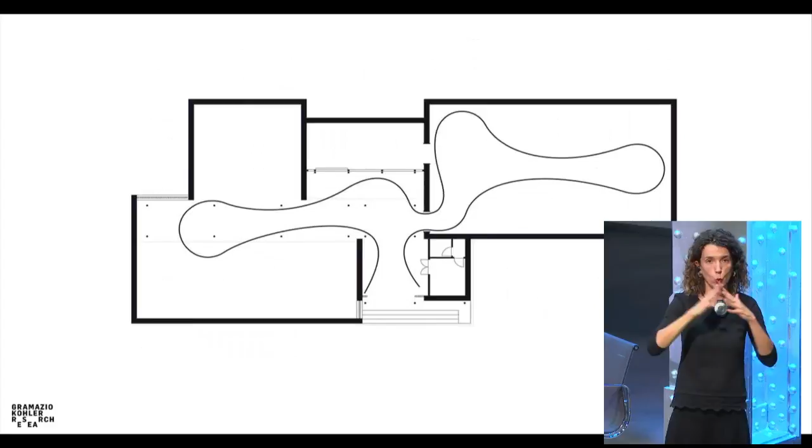Now, this was the installation in the pavilion. It's a 100-meter long wall, and the installation is called Structural Oscillations, because wherever this wall was relatively flat, the wall started to oscillate, and wherever the wall was curved, it just stayed curved, straight up.

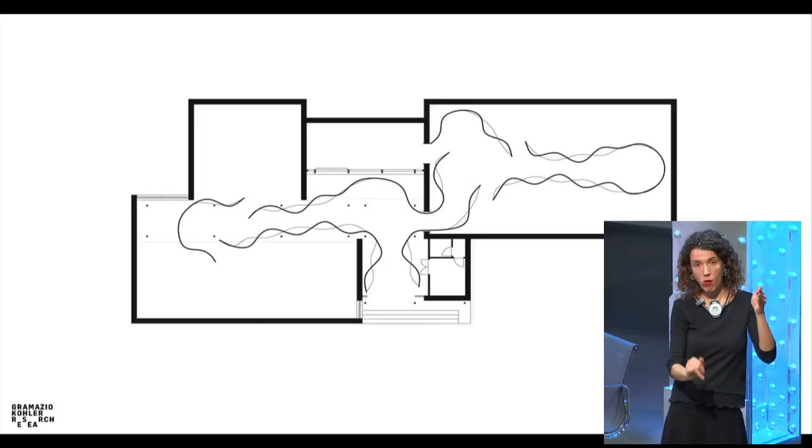Now, why did it do that? Well, this was a way to have all these individual wall elements standing by themselves, so you didn't need any further structural support, you didn't need any anchoring in the floor. Basically, it's like a sheet of paper that you fold a bit until it stands. So we embedded this kind of structural logic into the wall, and through that made a very simple constructive system to build it.

But you can also see that we did not design the actual shape of these oscillations. We designed the logic, the rules, the algorithm, you could say, on how this forms. And this is a bit the shift that we currently see, and the excitement that we have to design in new ways.

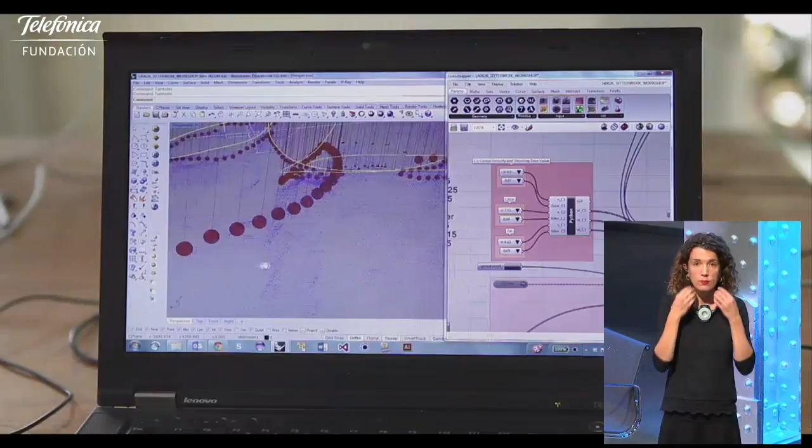And these structures at some points were very, very slender, maybe 10, 12 centimeters slender. The highest point, I think, was 2 meters 30, which we reached in this week. And I mean, it's very prototypical, it's not architecture yet, but you sense maybe there are completely other ways of building which we have not yet thought about.

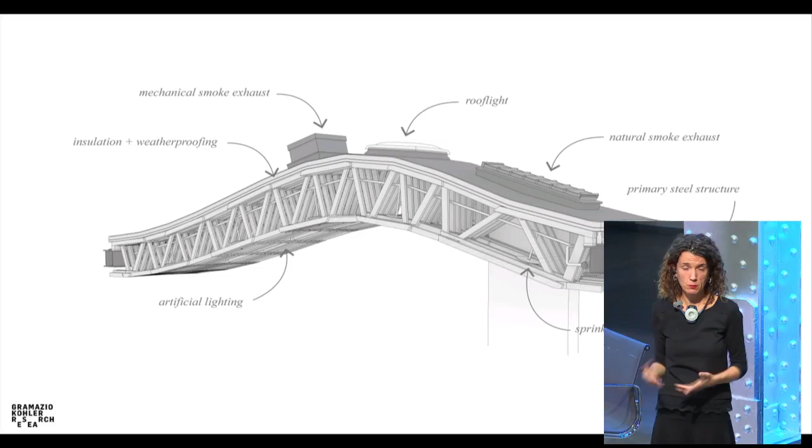So you see here these different systems, and now if you combine this with the plan that you've seen, you get a sense of how it adapts to every part. And whenever you change something—for example, if through the tendering process you got another manufacturer of the roof light—you change the roof light proportions, and this entire roof adapts to it.

And that's another advantage of these new design processes, that you actually stay flexible until a very late stage in planning. What usually causes huge turbulence if you change planning at a later stage becomes very easy here. If, as an architect, you think ahead about what could change later on in the process, you can build it in.

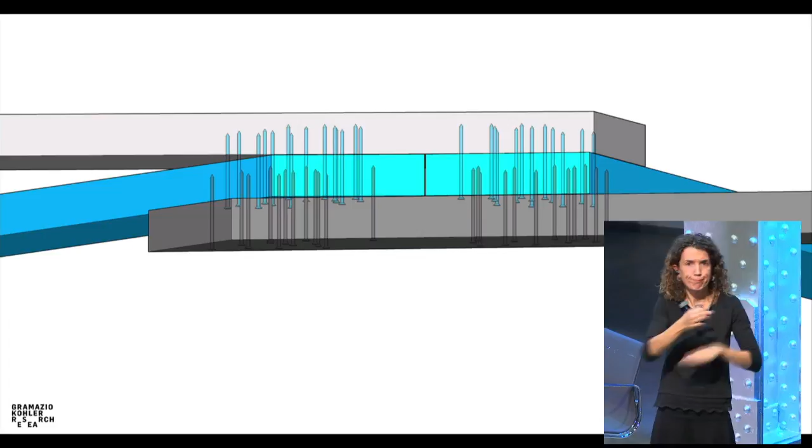To indicate why programming is needed, I'll show you this detail on how these slats connect. There are about 500,000 nails in this roof connecting these different slats. It's so complex to bring in these nails and fulfill the structural requirements while making sure you don't hit another nail in the next layer. It's really only algorithmically, with the computer, that you can do this. You don't want to do this by hand.

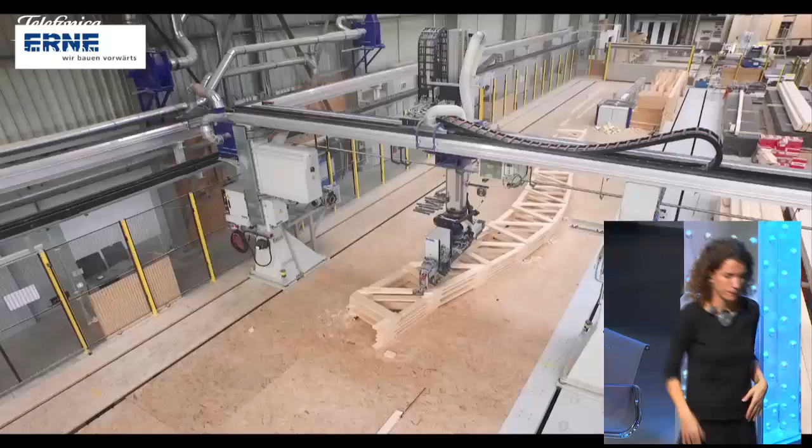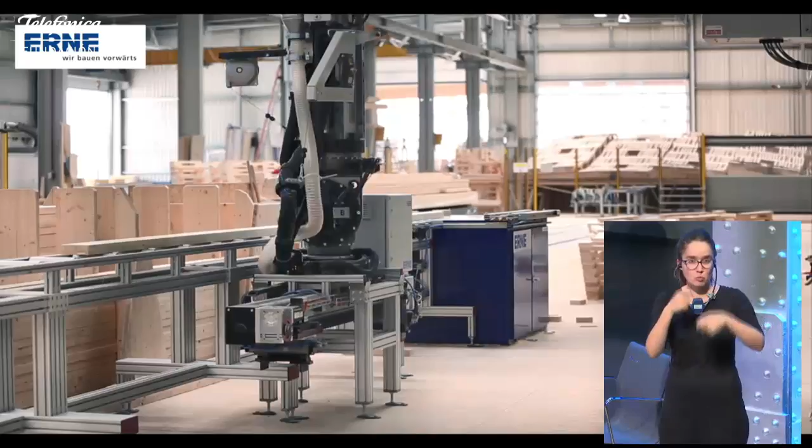So this is how it looks, and this is how the roof is produced. It's the Swiss manufacturer who specifically bought a machine to build this project, but is now able to do all kinds of projects with digital fabrication. So this robot basically takes a slat, cuts the different end angles, then lays them, does this nailing pattern you've seen before, then changes its aggregate, and does some end cutting and trimming.

What you really get is something again like a 3D printed beam, but here it's not printed from dust and binder or fused together metals. It's literally from material as you get it from nature, and connection. So it's very classical in that sense, using classical material systems and connection systems. At the same time, it's a fully digital additive construction process.

And it's quite economical, and like this we could realize this building. I can say that we all really like to live and work in this building, so we're the users also, and some other people, and most reactions are really very, very positive.

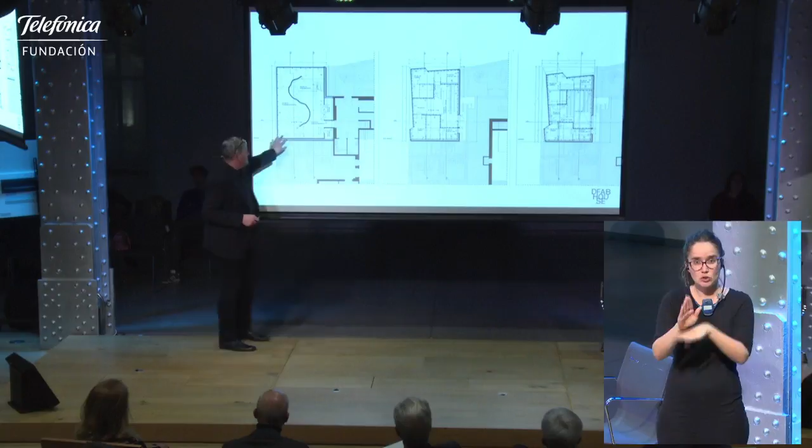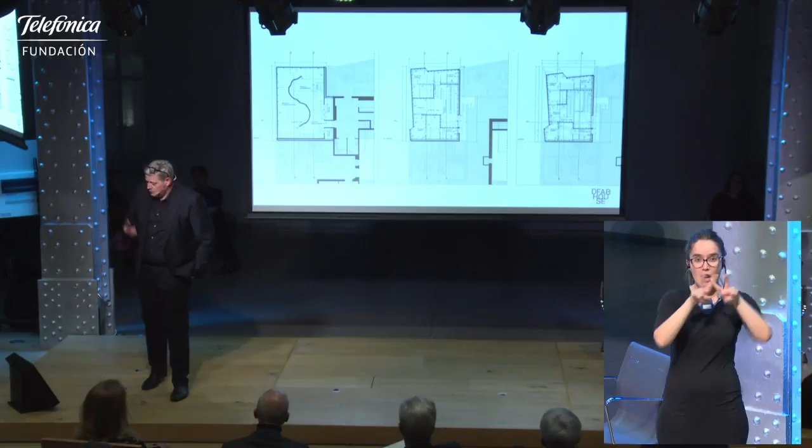Now we reconnect to where we were before, because a really good area to build this house is the Nest building you've seen before, and we got a parcel on it. Here you see the program of that house. It has basically a very open ground floor plan organized around this S-shaped wall, and then it has 4 living units for guest researchers in a quite dense two upper floors. So it's a 3-story unit.

This is the parcel that we got. This is roughly how it will look, but I'm not so interested in renderings - it might probably also change. We're really interested in the way that we build and design this. These are the different research projects that go into this building.

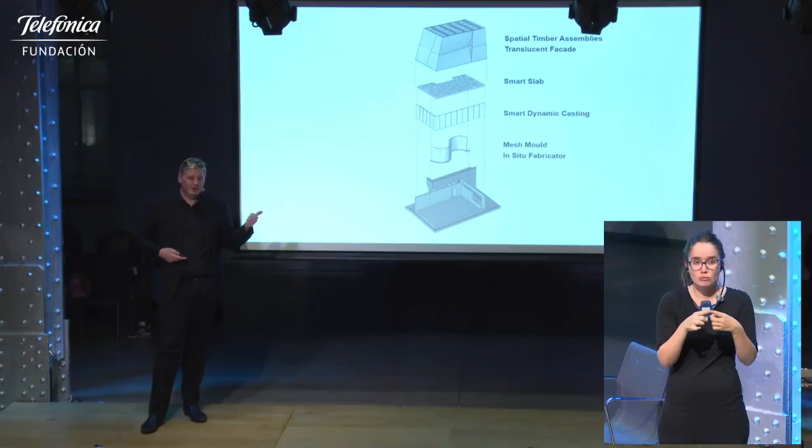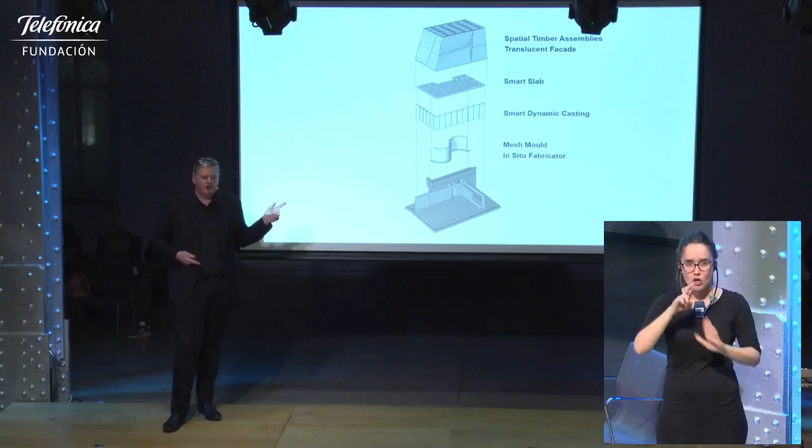What's really new in this building is that it's fully inhabited. It needs to comply to all codes in Switzerland, be it thermal insulation, fire regulations, etc. All the structural parts of this building are built by new digital fabrication technologies. So we bring digital fabrication from something which has a tendency to be ornamental to something really structural. That's the significant step, even though the building itself is quite small.

I'm going to walk you through quickly from below to top, just to give you a first impression. This is currently ongoing, so I also will not go into details. The first project is really this S-shaped wall, which is built by a mobile robot. This wall has been designed in a way that it can take the forces of, or carry the 2 stories on top, and take all the forces - also the wind forces, lateral forces - of the building. It's being built by a robot that builds this mesh structure that you can see here, optimized for fabrication.

You've seen the red parts before in this animation - red is when fabrication cannot work anymore. So it's optimized for fabrication, for structural performance, and for the spatial layout. Then this mesh structure can be filled with a manual process. So not everything is digital - it's a combination of human craftsmanship and digital craftsmanship.

It's not advancing anymore. Oh no, okay, here we go. Good, so that's the builder, or one of the builders. Somehow it's not.

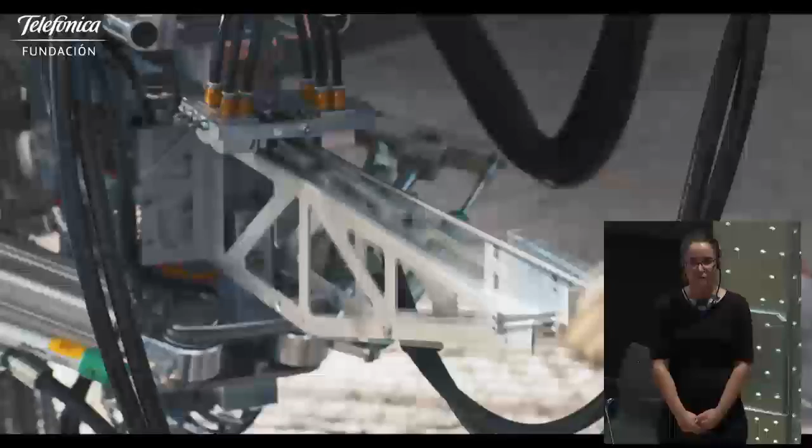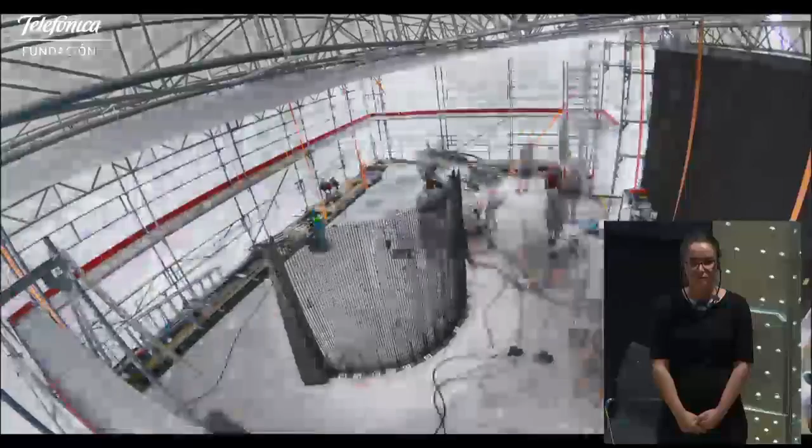If you take a look at the number of people and the robot on the construction site, you don't need to be worried in the short term. We have about a 4 people to 1 robot ratio. Now this video got stuck somehow.

So here are, at least from our group, the proud finishers. This has been a work in collaboration with another roboticist called Jonas Buchli, who developed the entire robotic system. His people are unfortunately missing from the picture. But I think you also see it's almost a pity to fill this structure with concrete, it's so beautiful just as this doubly curved mesh in space. You sense how the digital is very intimately connected to the physicality of this mesh.

So here are some impressions, and currently it's being filled. This is the first layer, and there's going to be a top coat on it. The remarkable thing here is that no formwork is needed to build this wall, so there's no waste for any formwork. You can build a doubly curved wall, saving a lot of material, and you can structurally optimize the shape, making differential wall thicknesses. So you can save a lot of concrete, and saving concrete is a big benefit for the planet, because concrete is the most polluting construction material we currently have, and it's the most widely used all around the globe.

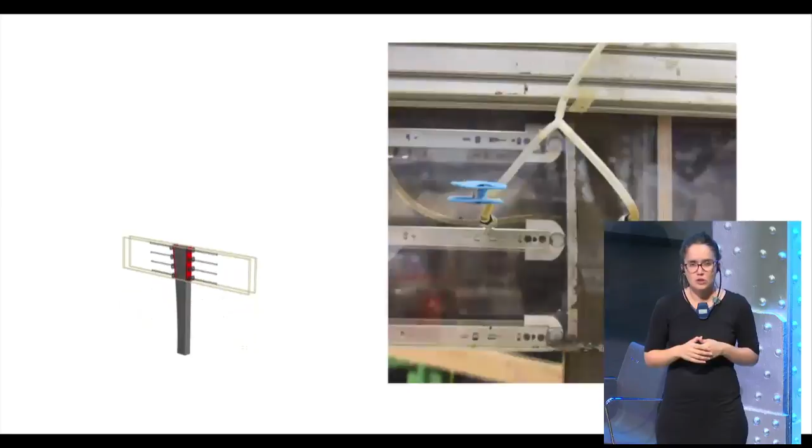I'll quickly walk you through this other concrete technology which we have. It's called smart dynamic casting. It's basically a slip casting process where you can change the form while you're slipping concrete, and you can produce elements like these facade mullions. Here you see one in a kind of drying situation, and here you see the final product, which has a very nice surface quality. We're almost at an industrial level.

Again, you don't need any formwork to produce these forms, and each of these mullions can be different. In this case, you have a different depth for each mullion, because the window panels don't all have the same size and don't all have the same loads. So you can have adaptive forms which have structural logics.

This is a project of the professorship of Benjamin Dillenburger, and our concrete, we call him concrete magician, Dr. Robert Flatt. This is a ceiling which is cast onto a 3D printed formwork, a very thin formwork, only about a centimeter thin, with very intricate forms. You can see these almost naturalistic forms, this high degree of detail, and how it adapts to the Mesh Mould wall below, directly taking over the formal characteristics of the Mesh Mould wall and reinterpreting it with another technique.

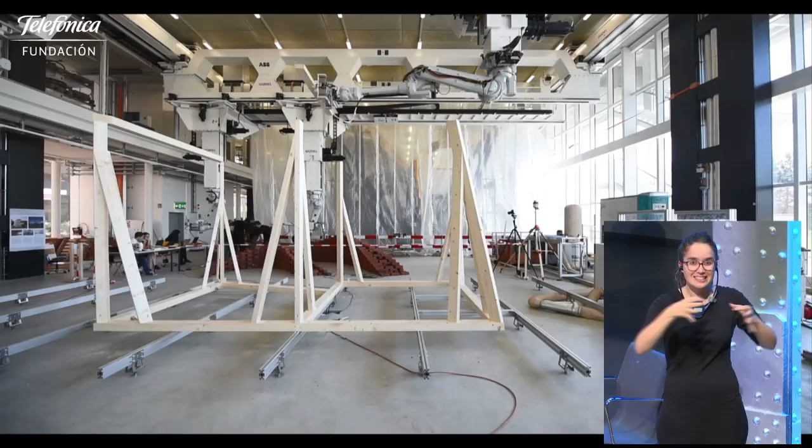So you need to find a sequencing logic where multiple robots can actually directly build spatial structures, and you see then there is an expression of this building typology in the structure.

You see how the robot, for example, once it places this beam, rotates in these side beams. So it comes here, drives in, then just rotates it in place.

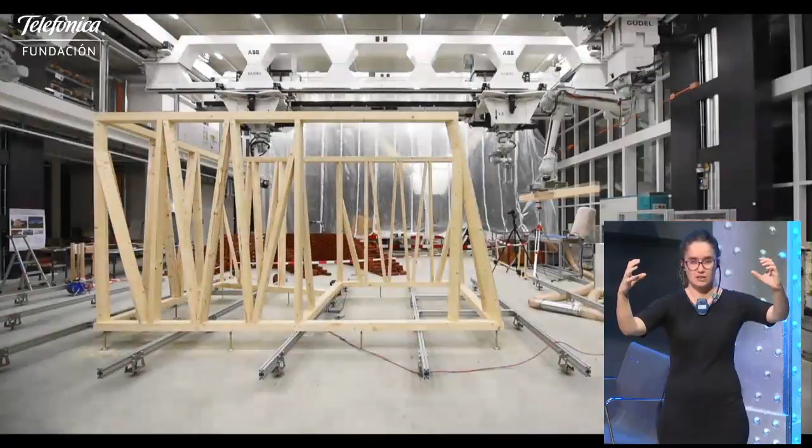And you can sense that, yes, it's close to what humans could do, but humans would really need to measure, etc. That's why they like to build on a plane, they don't like to build in space. But the robots really have the accuracy to just put something in space, wait till the other comes, etc.

This is also man-machine collaboration. The robots only really place the parts and cut the parts, and the humans do the connections because they're very fast, very agile, and see the details well. They can do minor corrections. So we don't need to automate everything to go into digital construction.

A bit of the complexity of these assemblies. Then we have a translucent facade developed for the system. This is roughly how it will look in the interior. So in the nighttime you will actually see the structure through the translucent facade. In the daytime it's actually very light, going to be a very light-filled spatial timber structure.

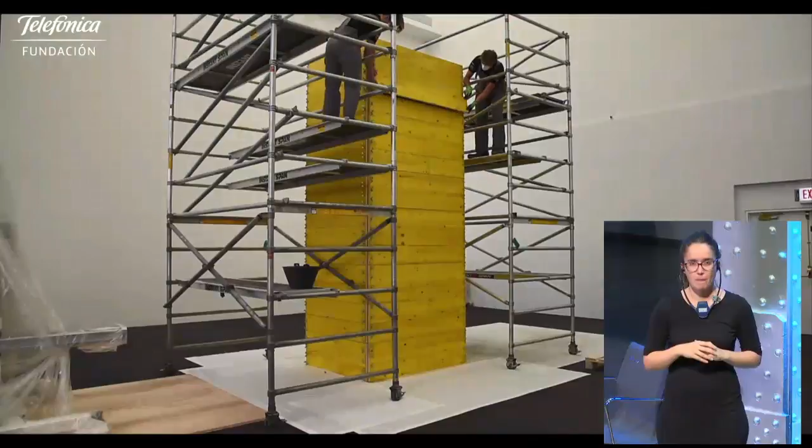Then by hand we add a layer of gravel, and then another layer of string, and so forth. So now the robot embedded some information in this volume while building it up.

And when we take the scaffold away, you sense there is some fall off, and if we then gently scrape this structure, you can unearth the information or the structure that was embedded by the robot in this gravel.

So in the end you get this vertical structure, our rock print, which only consists of gravel and string. There is no binder, no metal tube reinforcing this. It's just gravel, and if you walk onto it and touch it, gravel just falls off.

I did it a number of times with visitors there that said, no, that's not just gravel. I said, oh yeah, sure. And stuff falls off and they take a step back. It's quite scary. It's 2 tons of weight, and it's really quite impressive.

So it stood for 3 months. It didn't move a single time. We monitored it, and then of course the fun is to build it back.